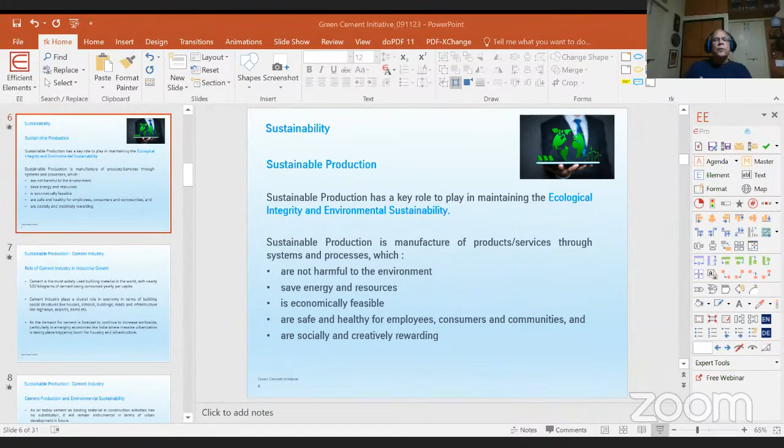Mr. Marat, yeah, please, can you just - your slides are not moving. Can you please shift to the slide show mode? Oh, I'm already in the slide show mode. Here it is, now let me see. Actually, can you please shift it now? Can you please click on that cup icon at the bottom side of the PowerPoint? Yeah, yes, it is. Now is it visible? It is in the normal form now. Yeah, now I click here. It's in the presentation form. Can you see the presentation form now? No, it is not coming. Oh my God. So is this visible? This is visible, so let's go on this basis. If it is not visible, okay, not at least, yeah.

So we have talked about sustainable production, and now role of cement industry in industrial growth. As I mentioned, the per capita consumption worldwide could be in the range of 500 to 550 kilograms. 530 is the figure I mentioned here.

Cement industry has a crucial role in all the urbanization, in building the social infrastructure like houses, dams, building roads, highways, airports, and it is like a commodity. I mean, it's not like an industrial product these days.

All demand for cement is forecast to continue increasing worldwide. All the infrastructural developments and projections will require cement, especially in emerging economies, in the APAC countries where India is a lead player, along with China. Massive urbanization is happening in India. There's a manpower shift happening from rural and mofussil areas to the cities, because that's where job creation is happening. So all this population needs dwelling and shelter, and that's where infrastructure development comes into play. This shifting and urbanization is triggering a boom in housing and infrastructure. In the subsequent slide, you will see almost 65% of our cement demand is from the housing sector. Let's go ahead.

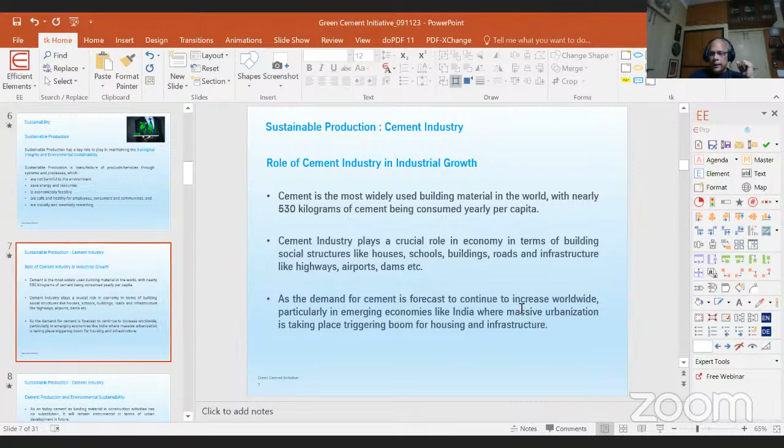Then, cement production and environmental sustainability. As of today, cement is a binding material in construction activities, and there is no substitute—there has been absolutely no substitute. What scientists worldwide are trying to do is reduce the carbon footprint, making the cement process more efficient and devoid of the ills it creates.

In terms of environmental sustainability, cement production requires water for cooling the machines and exhaust gases. So water is another important environmental component being used up. As cement plants are often located in remote areas, they draw water from community sources, because cement plants are located where the mines are.

As you all know, the primary component of cement is calcium carbonate, or limestone, which is a mineral that is mined. In the Indian scenario, limestone mines are more or less concentrated in the central part of India, the southwest part, the southeast part, and the western part, the Rajasthan side. We have now found mines in the northeast part too, though the reserves may not be as huge as in Rajasthan or western India. But these are all located in pockets, and that's how cement plants are located—close to the mines.

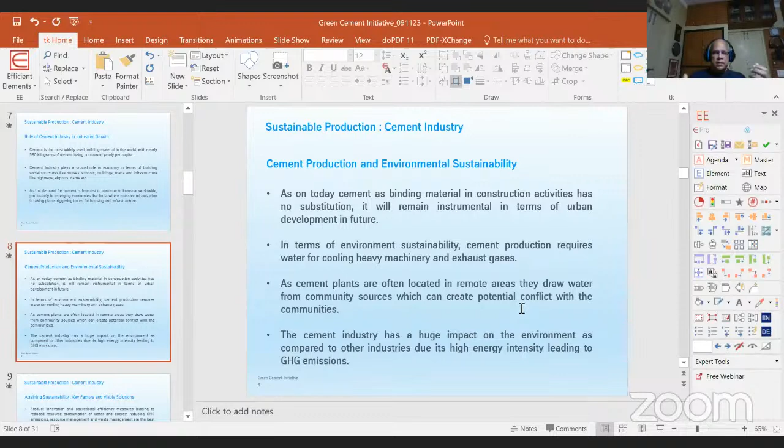The cement industry has a huge impact on the environment compared to other industries due to high energy intensity, leading to GHG emissions. Now, GHG emissions comprise NOx, CO2, and other toxic gases, which sort of cover the atmosphere and don't allow heat to be dissipated. As a result, the temperature of our dear Earth is increasing. Of course, this is coming in the subsequent slides.

Let's go ahead. Now, in attaining sustainability, what are the key factors and viable solutions relating to the cement industry? First is product innovation and operational efficiency measures, which are required to reduce the resource consumption of water and energy, and reduce GHG emissions. Resource management and waste management are the best ways forward. So the first and foremost is that some kind of innovation is essential to achieve higher operational efficiency. When I say operational efficiency, I mean in terms of heat consumption and kilocalorie consumption—that is, energy consumption and heat consumption. These are the two key parameters used to measure the performance of a cement plant, so innovative measures need to focus on these two parameters.

The viable solutions include production of green cement—we'll come to that, what green cement is—which will reduce reliance on depleting fossil fuels. As you know, in a classical cement plant in India today, we need about 700 to 730 kilocalories per kg of clinker produced. That is the kind of fuel consumption we require.

This energy is being provided from fossil fuels, typically coal in India. Today there's a shift toward pet coke. There is hardly any plant, in fact none, which uses oil because it is equally expensive and we are importing oil. So primarily the resource used is fossil fuel, and we are heavily dependent on this, brutalizing our fossil fuel reserves and damaging the environment.

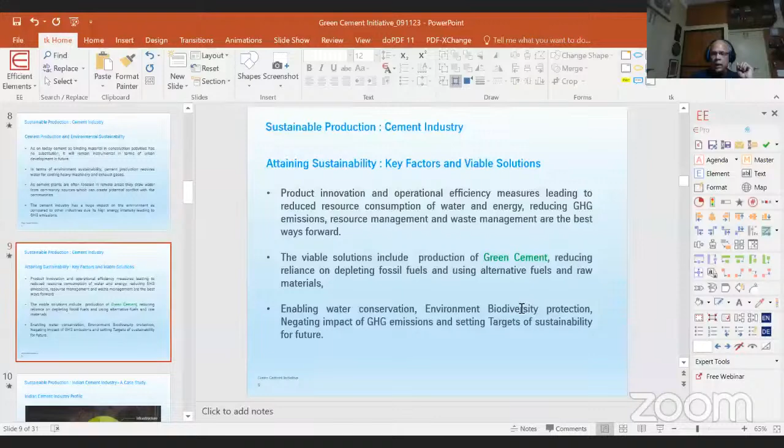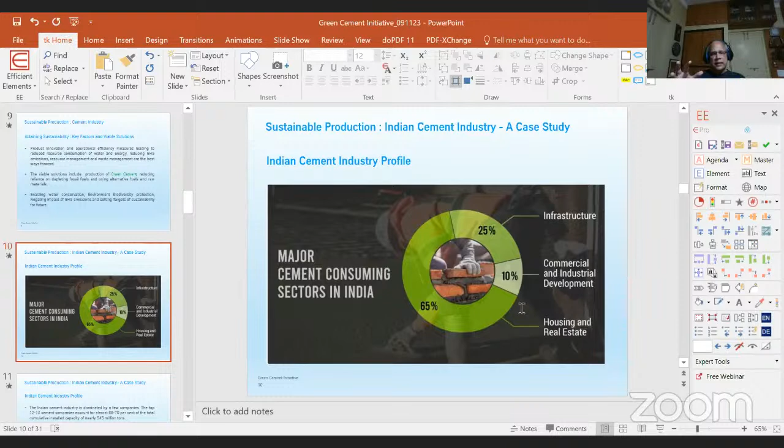Now let's look at the Indian cement industry profile. Today the Indian cement industry is dominated by a few companies, as you all know, you can count them on the fingers of one hand. There is Ultratech, which is the leading cement producer, in the range of 150 to 155 million tons. Then there's Adani, with the massive takeover of Lafarge and Holcim plants, at almost 70 million tons. Total installed capacity in India is about 550-560 million tons, so a chunk of the capacity lies in these 2-3 large companies.

Then there is Shree Cement and Dalmia Cement, in the range of 45 to 55 million tons. Then there are small regional strong players like Madras Cements at 15 to 18 million tons, India Cement at about 12 to 14 million tons, and many more. Wonder Cement, with 4 lines of almost 2 million tons each, already has about 10 to 12 million tons. These are the regional players that have a stronghold on regional markets, cultivating them in their own way. So the top 12-13 companies account for almost 68-70% of the total cumulative installed capacity in India.

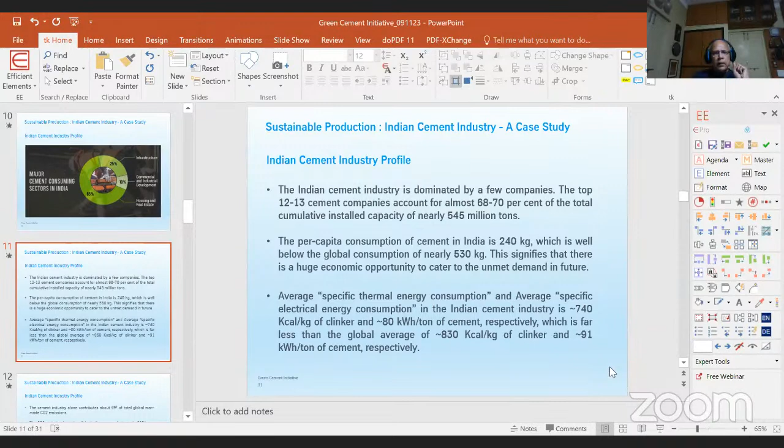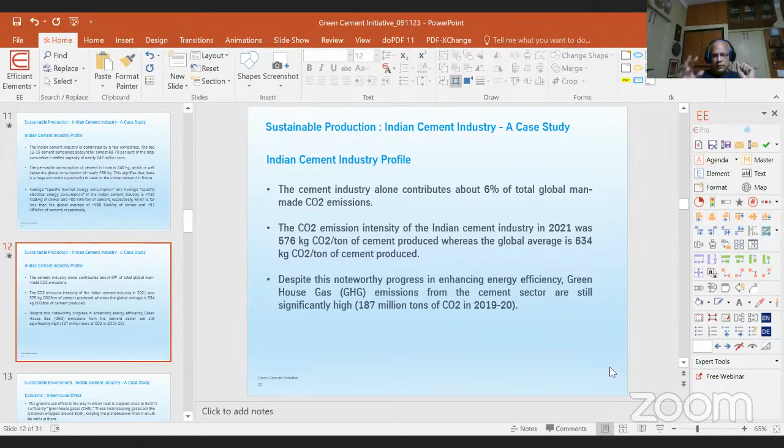Now, despite this progress in enhancing energy efficiency, the greenhouse gas emissions from the cement sector are still significantly high, which is about 187 million tons of CO2 in 2019-20. Today, I was told, just taking the net, it is in the range of 205 million tons in 22-23. So these are staggering, mind-boggling figures, and that is something that needs to be addressed as early as possible.

Now, what is a greenhouse effect? Of course you know, but this is just a quick slide. The greenhouse effect is the way the heat is trapped, as I mentioned. The notorious gases which sort of engulf the earth consist of carbon dioxide, primarily methane, nitrous oxide, and water vapor. So these are the greenhouse gases which engulf our dear earth and which don't allow the heat which is coming from the sun to be reflected back, and a certain amount of heat is retained.

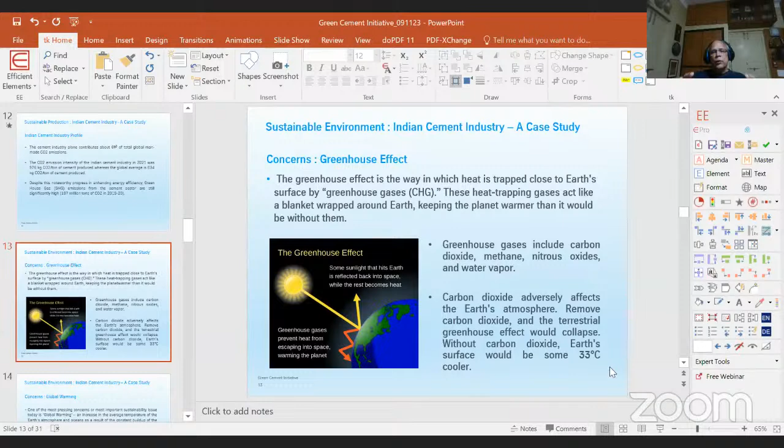And as a result, this is a very interesting observation, the carbon dioxide adversely affects the Earth's atmosphere. Yes, if you remove the carbon dioxide from the engulfing gases, the terrestrial greenhouse effect would collapse. That's what the scientists say. They say without the CO2, Earth's surface would be some 33 degrees cooler, which is phenomenal, mind-boggling. So you can imagine the kind of negative effect the greenhouse gases are having on Earth, and in which CO2 has a very significant role to play, and indirectly cement industry.

Let's go ahead. Now, what are the concerns for global warming? One of the most pressing concerns, or the most important sustainability issue today, is global warming. Now, as we talk about global warming, it has led to an increase in temperature of the Earth's atmosphere, temperature of the sea water, and in the second bullet you can see that the global climate report released by the US National Oceanic and Atmospheric Administration says that the global and land ocean surface was 1 degree above average, 14.8 degrees, in the 20th century. So, okay, 1 degree is something which is insignificant, but see the gigantic effect it has over a period of, let's say, 4 or 5 decades.

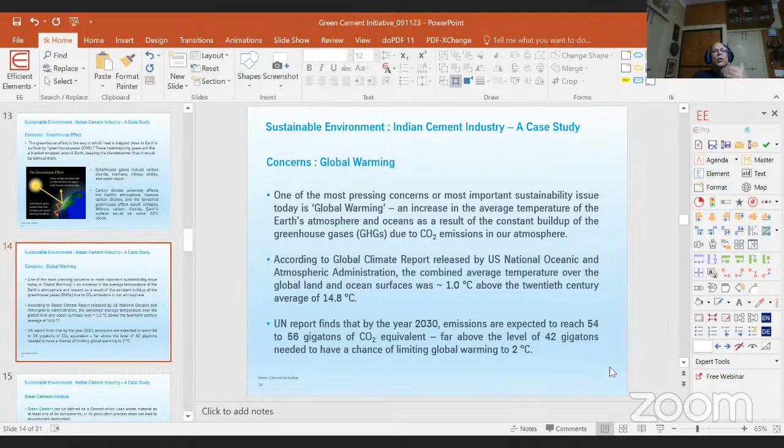Now, a United Nations report finds that by year 2030, which is not very far from here, emissions are expected to reach 54 to 56 gigatons of CO2 equivalent, far above the level of 42 gigatons. Now, 42 gigatons has been identified as the level at which there is some hope or chance of limiting global warming to about 2 degrees. So we are already surpassing that. So obviously we are heading towards global warming by more than 2 degrees. That is preposterous. I mean, that is quite scary.

Now, green cement initiative. Green cement can be defined as a cement which uses waste material as at least one of its components, or its production process does not lead to environmental destruction. So this has generally been defined as a green cement.

Traditionally, as you know, the cement process involves sintering of the cementitious material, which primarily consists of limestone. You have what we call additives - you have bauxite, you have iron ore, you have sand, and when you fuse or sinter, then clinker is formed, and this clinker, when ground with gypsum, is cement, which is popularly called ordinary Portland cement. Now, with these initiatives, if you go on adding cementitious material in clinker, obviously the contribution of clinker per ton of cement is going to reduce. We'll see in the subsequent slides how it's going to happen.

So cement production, as we mentioned, contributes up to 6% of global man-made CO2 emissions, and thereby is the third ranking producer of man-made CO2 in the world.

Production of 1 ton of cement results up to 756 to 760 kgs, that's 0.76 tons of CO2. 55% of it is coming from the process, and that is an inevitability of the cement manufacturing process, because the limestone primarily consists of calcium carbonate, CaCO3, and when you are calcining it, you are allowing the CO2 to be released. So CaO remains and CO2 is released. Almost 55% of emission, on which at the moment we do not have very significant control, is coming from the process emissions.

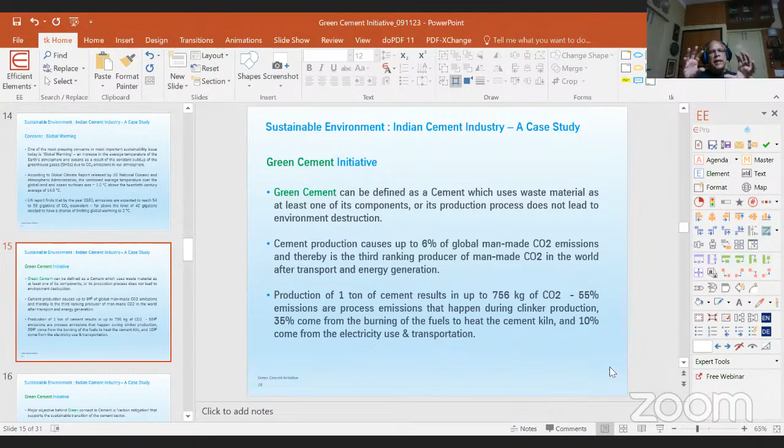So these are the key initiatives behind green cement. Now let us go ahead.

Staying with the initiatives, the major objective behind the green concept in cement is carbon mitigation. This whole game is being played to finally arrive at carbon mitigation. We are trying to reduce the carbon footprint which the cement industry is creating, so that it supports the sustainable transition of the cement sector. So carbon mitigation is the key word.

Now, what are the carbon mitigation levers? The first lever is reducing the clinker to cement ratio. As I mentioned, per ton of cement includes 95% clinker and 5% gypsum - this is the classical ordinary Portland cement. But if you have PPC, the Pozzolana Portland cement, in which fly ash is added to the tune of 30 to 35%, you are indirectly reducing the clinker component, and indirectly reducing the carbon footprint, because per ton of cement you are reducing more and more of the clinker component.

That is how the carbon mitigation process or levers are defined. So: reducing the clinker to cement ratio, and switching to alternate fuels. As I mentioned, 35% of the CO2 generation or emission is coming from fuel, so a shift to alternate fuels will reduce the CO2 emissions.

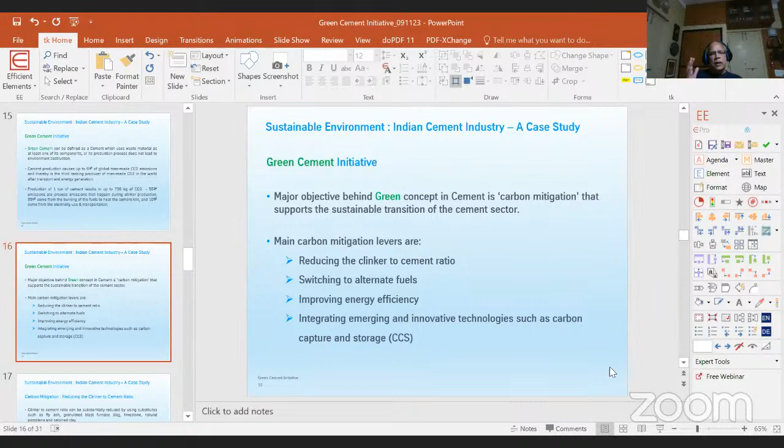It's in a very nascent stage in India at the moment, but carbon capture and storage is the future, as far as I see. Now, just a minute.

As far as carbon mitigation is concerned, the first point was reducing the clinker to cement ratio. As I mentioned, from a classical ordinary Portland cement, which has 95% clinker, you can go on adding cementitious material to ensure that the quality requirements - the setting time, the workability, the strength, the 28-day strength, the 7-day strength - are still maintained. You have adequate standards to produce this kind of cement, so you can reduce the clinker.

Now you can add fly ash, you can add granulated blast furnace slag, you can add limestone, you can add natural pozzolana and calcined clay.

Now there is something interesting here. The maximum percentage of use of these substitutes, as per the Indian cement standards: fly ash you can add up to 35%, which directly reduces the clinker component to almost 60%. Ground granulated blast furnace slag can go up to 65%, but for that the slag needs a certain quality and chemistry. Typically in Indian industry, up to 50 to 55% of granulated blast furnace slag can be utilized, for which you need to maintain high quality clinker. I won't go into the chemistry, but this is how the balance takes place. And natural pozzolana can go up to 35%.

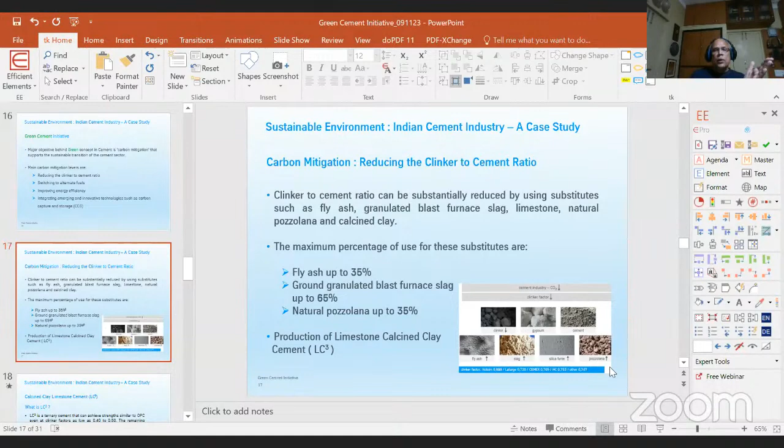Now there's an interesting new development called LC3 — limestone calcined clay cement. The 3 C's is why it's called LC3. In the clinker you can substitute this. So what is LC3? It's a ternary cement that can achieve the required strength like OPC, even at clinker factors as low as 0.4 to 0.5. That means per ton of cement, just 40% clinker is required. The remaining is a blend of crushed limestone and calcined clay.

Now, those who know cement chemistry will ask, how can limestone without being calcined be used in the final cement? The answer is because of the calcined clay. When you partially calcine the clay, it becomes highly reactive. This highly reactive calcined clay, along with cement and classical clinker, gives you all the attributes of normal cement. Calcined clay and limestone are used to substitute part of the clinker in blended cement. The clay typically contains 50 to 60% kaolinite, and you need this very special type of clay with that level of kaolin.

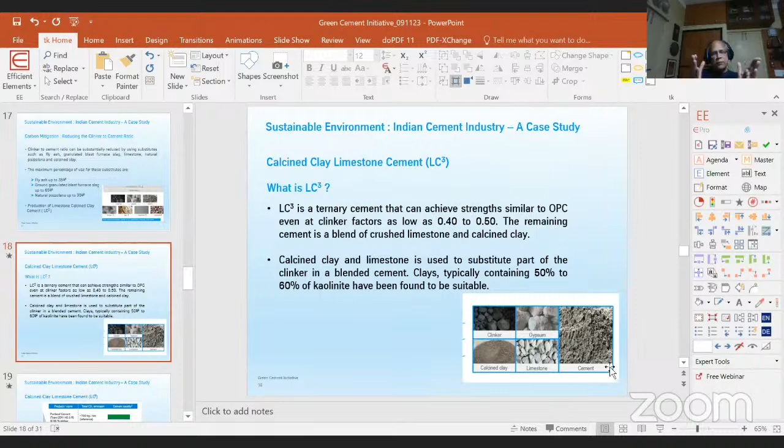In India, we have found clay deposits in Rajasthan, in the northwest part of India. But these reserves need to be very carefully investigated and analyzed, and only if found suitable can the clay be partially calcined and used as LC3. This is a new emerging field, and I'm happy to convey that the Government of India constituted a steering committee to study the feasibility of manufacturing LC3 in India. IIT Delhi was part of that, and just a few months back a standard evolved, like a normal Indian standard, giving the quality requirements of LC3. So it is a reality now. Cement producers like Dalmia Cement and Shree Cement have done extensive experiments on the clay available in Rajasthan, and found that it has the requisite amount of kaolin to make LC3 cement.

Now let me give you an idea of calcined clay cement, or LC3. Comparing: first column is product, second is total CO2 emission, third is cement quality. Portland cement with 95% clinker is taken as the reference, with 750 kg per ton of CO2 emission. With blended cement at 20% limestone, you come down to 600 kg. With composite cement using 30% additive materials, you come down to 550. But with LC3, you dramatically come down to 450. This is a paradigm shift as far as total CO2 emission is concerned — this is the technology of the future.

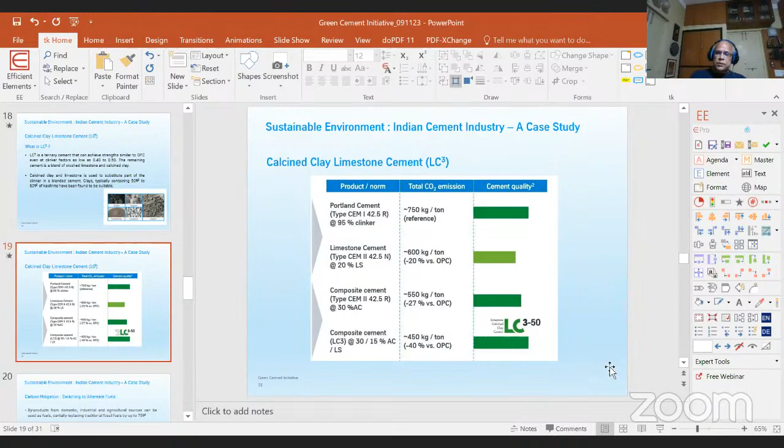Now, staying with carbon mitigation, switching to alternate fuels. Byproducts from domestic industry and agriculture sources can be used as fuels. Though they may be of low calorific value, they can still be used. This requires special modification to the calciner, the machinery, and the preheater, undertaken by machinery manufacturers, which will enable partial or full replacement of traditional fossil fuels.

Today, worldwide, it has gone up to 75%, but I think there are plants in India and Germany, in the plant in Lägerdorf, they are going up to 94%. That means almost 94% of their fuel requirement is met through alternate fuel. That is significant and that is substantial.

In India, as far as I know, the overall average is still hovering around 10 to 12%, or 8 to 10%, let's say, primarily because the government of India feels that the responsibility of procuring the alternate fuel, the municipal waste, the agricultural waste, the pharma waste, should lie with the cement producer, which somehow is not working out. I'm not going into the details of what is right, what is wrong, but the cement producers are not willing to take over that responsibility, and they are looking at the government to give them an alternate fuel product in a certain sorted out fashion. But that's not happening.

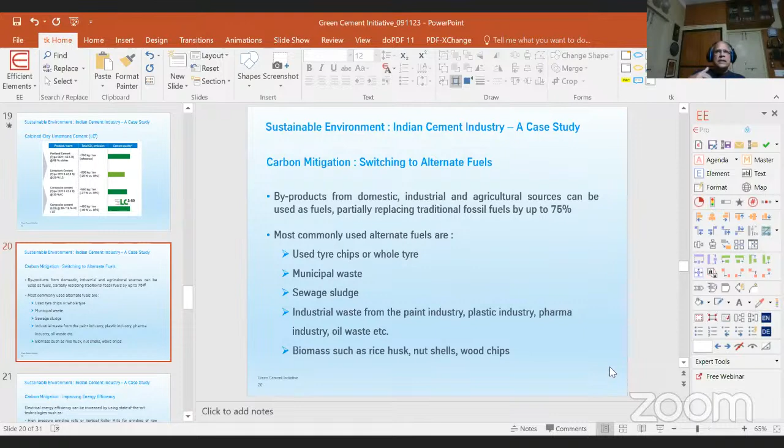There are examples, I believe in Andhra Pradesh, My Home Cement is doing that. Then there is one more near Hyderabad, that is Sagar Cement doing that. But there are very few, a handful of cement plants who have taken over the responsibility of collecting the alternate fuels, sorting the alternate fuels, and then utilizing and contributing to the environment.

Then, again staying with carbon mitigation, improving the energy efficiency. Obviously, as I mentioned, you improve the energy efficiency, you reduce your power draw from the grid. So indirectly, you reduce the fossil fuel utilization in the power plants, and then you reduce the carbon footprint. This contributes, as I mentioned, 55, 35, and 10. So almost 10%, but still it is a significant percentage of the total CO2 contribution.

So today, as you probably must have heard, the classical ball mills, which were used for grinding, are being replaced with high pressure grinding rolls and vertical roller mills, wherein you can achieve savings in power to the tune of 11 to 14 units of raw material.

You can go with peripheral equipments, and the main peripheral equipment which controls the cement process is the process fans, the preheater exhaust fan, the cooler exhaust fan. That is available with high efficiency. Today we are talking of fan efficiencies of 82, 83%, which in former times was around 70, 74%. So 6 to 7% more saving on fan power can be achieved these days. You can use variable speed drives to optimize the pressure and volume combination, and then optimize the power consumption.

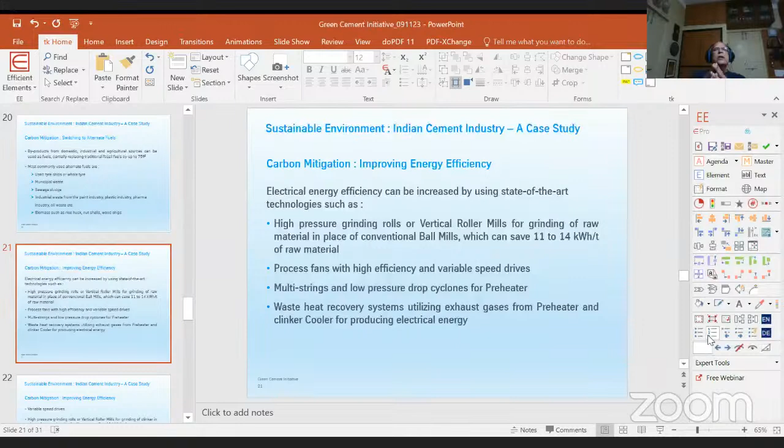Typically, I would say, if you go by the thumb rule, it's mandatory now. All the greenfield plants need to go with a WHR system, waste heat recovery, and instead of allowing the heat to be thrown into the environment as waste, you recycle it and generate power, and become sustainable. So today, a million ton plant, about 3,000 tons per day, can expect to generate about 3.5 to 3.7 megawatts of electrical energy, which you can utilize yourself and reduce the grid consumption.

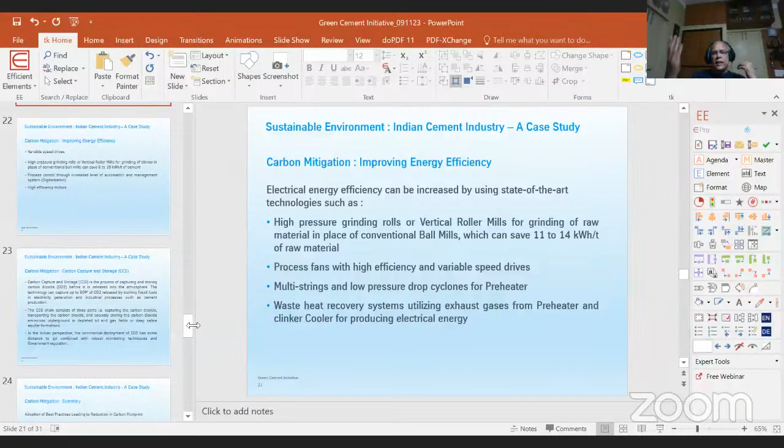Staying with carbon mitigation, on improving the energy efficiency, I mentioned we can use the variable speed drive, you can optimize your power consumption. You can use high pressure grinding rolls and vertical mills for clinker grinding also, not only raw grinding. In the earlier slide, we have seen the raw grinding. In clinker, that is clinker to producing cement, you can reduce 6 to 10 units.

Then, for process control, you can employ the digitalization concept. You can optimize the fluctuations in fuel, the fluctuations in the raw material. These are small, important, but precious steps where the contribution may not be huge, but still it contributes, and it is measurable and significant as far as the environment is concerned.

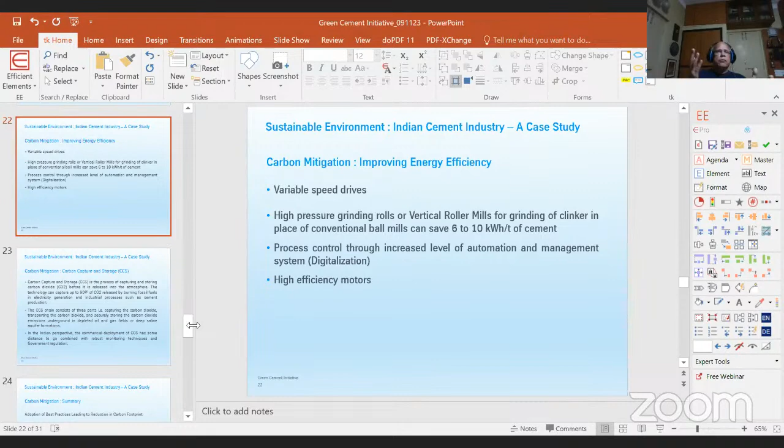And then you can go with high efficiency motors. Today, we are talking of HT motors of 94, 95, 96% efficiency, which in former times used to be in the range of 84 to 86%. So there is a substantial saving.

Now, we talked briefly about carbon capture and storage. Carbon capture and storage is the process of capturing and storing carbon dioxide before it is released to the atmosphere. There are technologies available, but I won't go into the technical details as that could be a separate session. The technology can capture up to 90% of the carbon dioxide released by burning fossil fuels, so this carbon dioxide is not allowed to be sent into the environment.

The S part is storage, and storage is the challenge. The chain consists of three parts: capturing the carbon dioxide, transporting the CO2, and securely storing it. So the S becomes extremely important.

So where to store? It has to be stored underground or in deep saline formations. That means you can do it in the ocean, or in abandoned mines.

In the Indian perspective, we are still in a very nascent stage. The commercial deployment of CCS has some distance to go, and I think it will take at least a few more years, maybe 10 to 12 years, before very viable, feasible, economically viable alternatives and options are available.

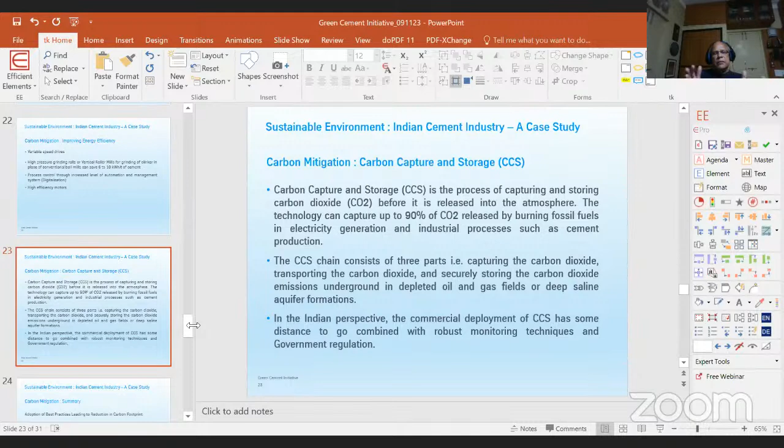Summary: carbon mitigation and adoption of best practices lead to reduction in carbon footprint. As I mentioned, from all these initiatives worldwide and in India, the total CO2 emission level has reduced from 1.12 tons per ton of cement in 1996 to about 0.72 now, and is targeted to go to 0.5 tons in 2030.

It will be interesting to know, gentlemen, that Dalmia Cement has drawn a way forward. In international conferences, they have announced that by 2030, the complete Dalmia Cement group will be carbon neutral, which is a phenomenal achievement if they really do so. They are employing various such measures in the process, and it will be a very interesting case to observe.

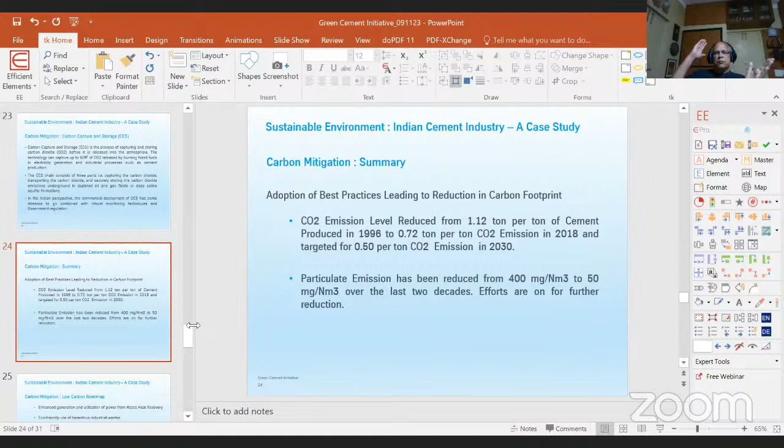Particulate emission has been reduced from 400 milligrams per normal cubic meter to 50 milligrams, and now the norm has gone even beyond. The new legislations talk about 20 to 25, so we are on the right track to reduce environmental pollution, particulate environmental pollution, to almost 20 - that's a paradigm shift from 400 milligrams to 20 milligrams.

Then the low carbon roadmap for carbon mitigation, to summarize: enhanced generation and utilization of power from waste heat recovery that I mentioned, because a 1 million ton plant can generate about 3.5 to 3.7 megawatts. Also, eco-friendly use of hazardous industrial waste.

Industrial waste, instead of being dumped in the environment, can be utilized. So the processes need to be modified, and the machinery design needs to be tweaked and refined where necessary.

Enhanced utilization of fly ash generated from thermal power plants. If you recall, fly ash used to be dumped in open fields. Now, fly ash is extremely fine - it's the ash that escapes and is trapped in the ESP, in the range of about 20 to 30 microns. If you just dump this extremely fine fly ash dry, it is going to fly away and pollute the environment.

So this needs to be dumped in a water pool, but that was creating its own hazard, because even if you want to utilize the fly ash, a huge amount of water is required to be evaporated, and that again consumes heat. So the whole balance needs to be looked at. But at the end of the day, the standard Indian cement standard for PPC, that is Pozzolana Portland cement, allows fly ash addition up to 35%.

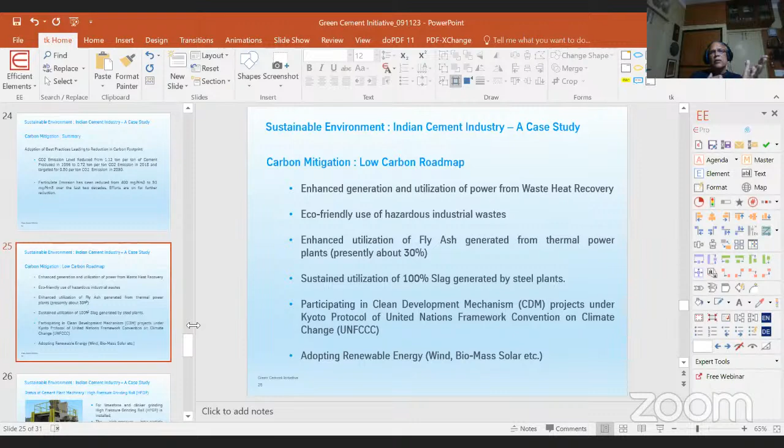Adopting renewable energy, that is wind, biomass and solar. I think this isn't the forum to talk about these things in detail, because we still have some distance to go. But the present government has laid huge emphasis on solar and wind power, which is evident if you go to Gujarat, or South Tamil Nadu or Kerala, where a lot of wind farms and solar farms are coming up. The target is 180 gigawatts in the next 10 years, which will definitely reduce fossil fuel consumption in power plants.

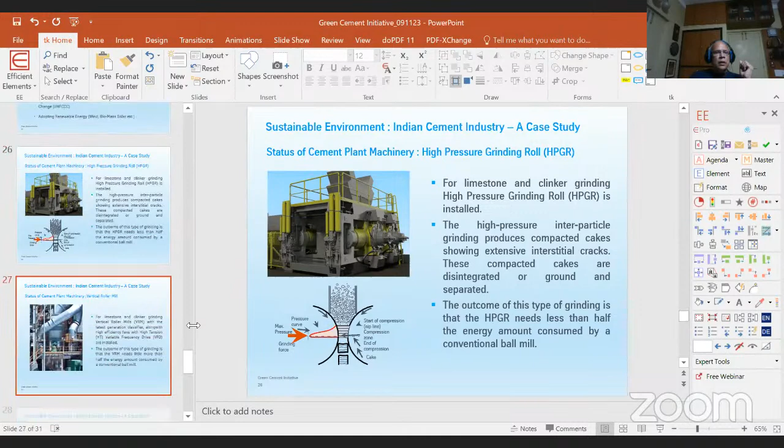Now, coming to the cement machinery part, since we've looked at the process, the fuel, and the raw material. As I mentioned, you can optimize power consumption by utilizing high pressure grinding rolls, produced by ThyssenKrupp and other manufacturers, which can dramatically bring down specific power consumption. Then comes the vertical mills.

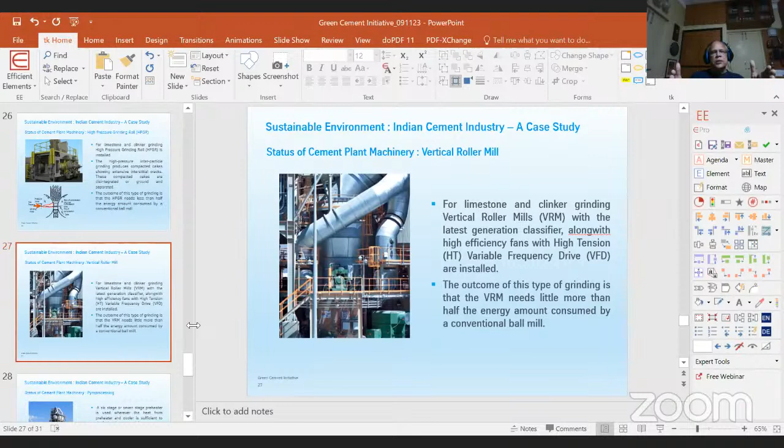Traditionally we were using ball mills, which were the most inefficient way of grinding raw material as well as cement, wasting a lot of energy. The kilowatt hour consumption per ton of cement produced can be reduced dramatically, almost by half, if you go with modern technologies like vertical mills or high pressure grinding rolls, not only for limestone but for clinker grinding also. Vertical roller mills are produced by a number of manufacturers across the globe, and this is the initiative with which you can reduce power consumption.

In the machinery itself, you can go with higher stages. Just a word about the number of stages: going from 5 stage to 6 stage preheater means changing the calcination degree going into the kiln. By using a 6 stage preheater, you're using a more optimized amount of the heat available, and by increasing the number of stages, you reduce heat consumption. This innovation is already in place, and preheaters are associated with efficiency and low pressure drop cyclones, a technology which has come to stay. It's widely used and has contributed a great deal to heat and power consumption reduction. It also caters to low NOx calciners.

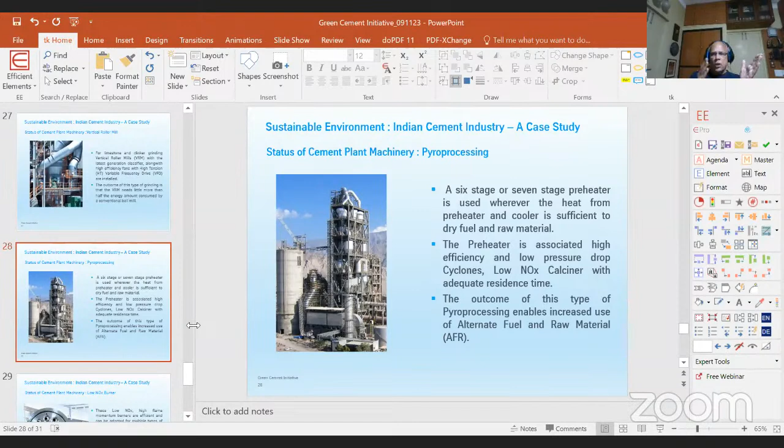NOx is again a greenhouse gas which needs to be controlled. There are strong legislations in place, and I must compliment the government for taking cognizance of this environmental pollutant and bringing in legislations to control it. So NOx legislation is also in place.

Also, there are low NOx burners. All these details primarily relate to NOx, which comes from fuel as well as from the raw material. Now, there is thermal NOx, which is the biggest contributor to NOx. Thermal NOx is generated during the burning of the fuel, which takes place in the burner itself. So we have to design burners that combust fuel with low NOx generation. That's what we call low NOx burners.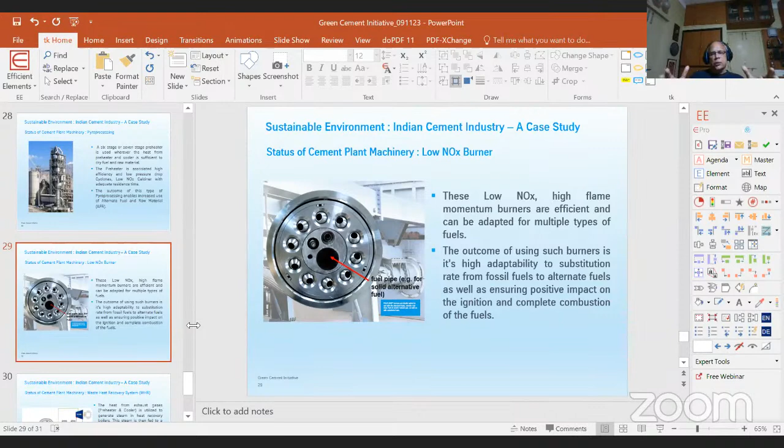Now, all the leading manufacturers, including ThyssenKrupp, have this technology in place, and this is being used in modern cement plants.

And lastly, I've talked about the waste heat recovery system. This is something ThyssenKrupp also manufactures, with more than 50-60 plants supplied in cement plants. A 1 million ton plant can give you about 3.5 to 3.7 megawatts. The thumb rule is about 1.2 to 1.5 megawatts per 1,000 tons of cement produced. So to give an example, a 10,000 TPD plant can generate about 11.5 to 11.8 megawatts. That's the kind of value we're looking at. Indirectly, we are reducing the carbon footprint at the power plant stage.

That's all from my side, gentlemen. Thank you very much for your patience.

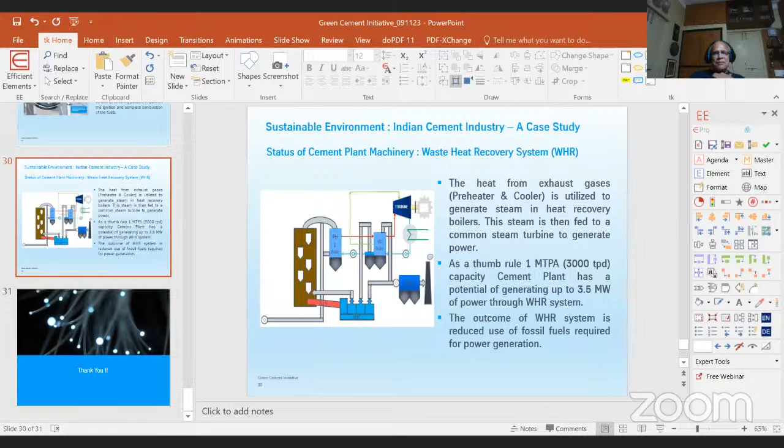We are thankful to Mr. Marathe for the extremely lucid and wonderful presentation. Thank you, sir, thank you very much. We are all enlightened by your sharing of thoughts. There are many issues because we perceive cement as a commodity, but it is also an ingredient for the development of infrastructure. Practically, for many of us, the idea is limited only to being the end user. But the production of cement and the equipment and technology involved, you have wonderfully touched upon, particularly focusing on the production of green cement.

So before the session is opened for questions and answers, may I now request Mr. Anirban Datta, who was also in the same organization as Mr. Marathe, that is ThyssenKrupp Industries, one of the largest technology providers in various sectors, starting from steel and metals, non-ferrous, power generation, mining, as well as cement manufacturing. I request Mr. Anirban Datta, who is also a passionate crusader for the cause of climate change, to add a few words on this.

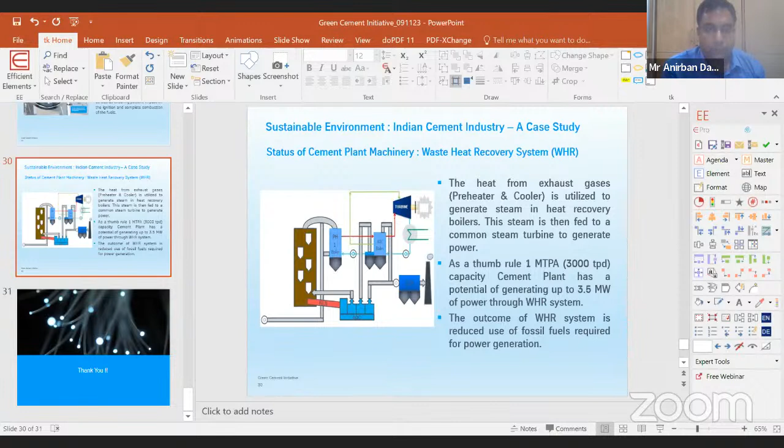After I've heard Mr. Marathe talk about the Green Cement Initiative, especially addressing sustainability issues, I'm quite pleased he touched upon the social and other issues other than the technological ones. I don't have a very clear idea about the cement process, so I would refrain from making any comments on his presentation, and I would not be in a position to talk about it.

But at the same time, I have two or three things I wanted to pop up, to see if it makes sense for Mr. Marathe to pick up. See, 240 kg per capita consumption as against a 530 or 550 global average - is it not related to the population density, which we have about 1.4 billion... So as far as the industry scope is concerned for expansion, for reaching from 240 to 500 or 550, whatever Mr. Marathe has spoken about, that 240 is possibly derived from the total consumption divided by the population. If that is the case, then it ought to be much lower. So many scientists say India's contribution in terms of GHG or CO2 is much lower, primarily from the per capita contribution. So from that point of view, Mr. Marathe has very lucidly talked about the various initiatives being taken by the cement industry manufacturers.